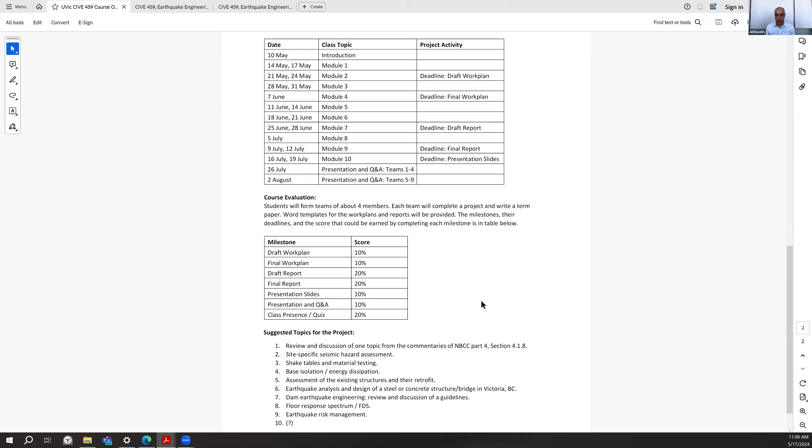So you guys have about 1 week to form your team and have a quick discussion and decide about the topic from the suggested ones or other topics, or even email me or email Behnam and ask what we suggest. Just create your team, write a draft work plan for us by about Friday next week, and upload it to Brightspace. That should not be too difficult.

As you see, even submitting the draft work plan has 10 scores out of 100. So don't skip it. If you jump into final work plan, you will lose 10%. I'm trying to really convince everyone to work with a schedule, and you will be very happy by about mid-July because you have done everything for this course.

That's about the outline and the schedule. And I think we didn't finish this one. Let me see if I can make it full screen. I'm using 2 screens today, so the microphone and speaker has changed, but I'm not seeing anybody objecting, so I think I'm audible. You guys are hearing me. For full screen mode here, and it's shared.

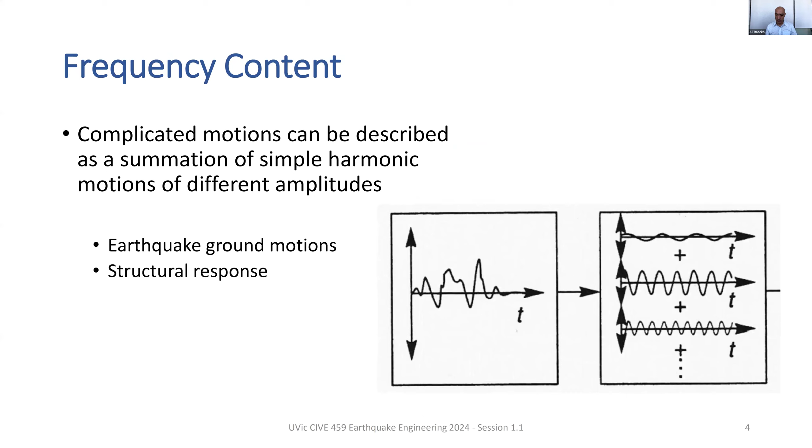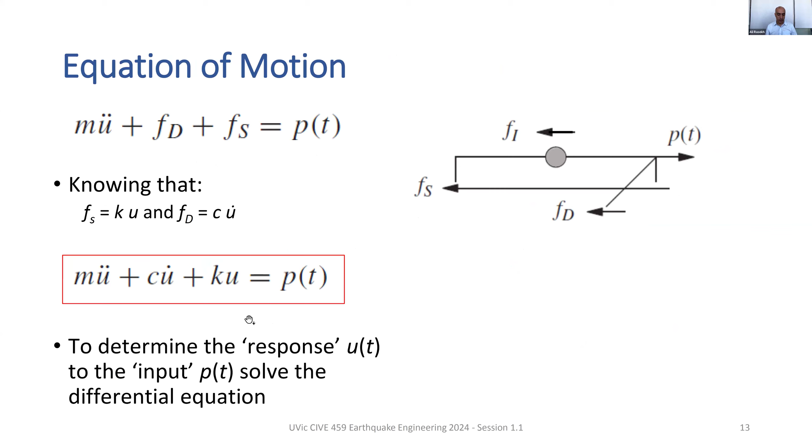Last time we tried to just talk about the basics of dynamics of structures, probably the most important slideshow right in front of you for most of the term. We covered the basics. We talked about the stiffness, mass, equivalent lateral load, and why the solution is sensible.

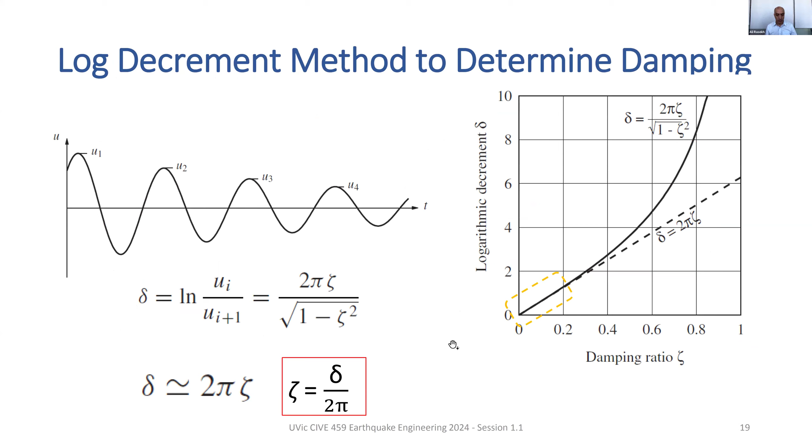What do we mean by free vibration? How can we use the outcome of a free vibration test, whether it's an experimental test or a numerical modeling test? For both of them, this works to obtain your period and also your damping, which are very important parameters. Real life experiments.

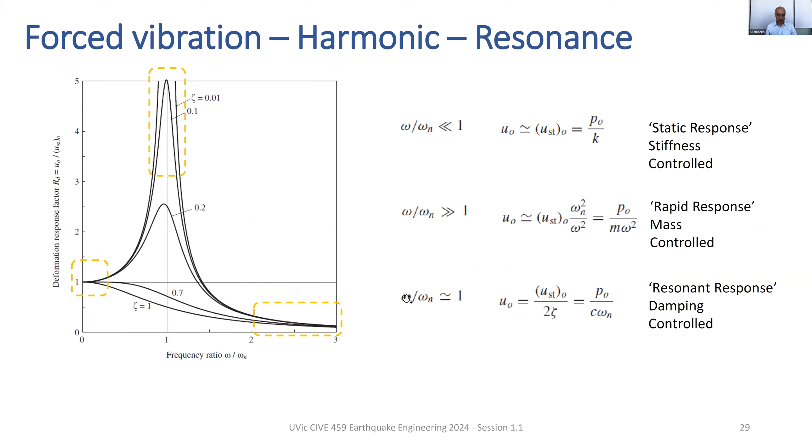And what if we have ground motion excitation, which is earthquake? Harmonic excitation, it's important and a useful tool, a little bit more advanced, but useful, using half power bandwidth to again estimate your period and damping.

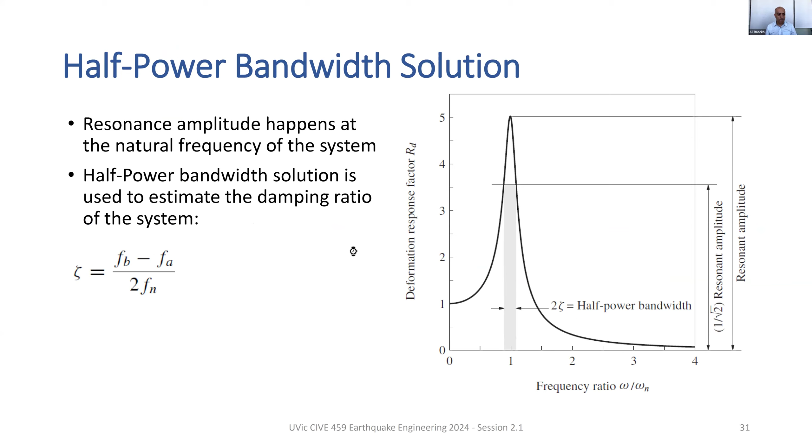Okay, I think we stopped right here, numerical time integration. A lot of times there is no closed form solution for real world problems, whether it's earthquake or shaking of a structure. On the other hand, myself and the newer generation are becoming too lazy to learn and understand the closed form solutions, and we prefer computer tools, which are mostly based on numerical time integration. We are becoming lazy, but we cannot be too lazy, because we cannot produce wrong results and blame it on the computer. We are in charge of correctness of the solution.

So there are some basic concepts in numerical modeling. The idea of time stepping. Time stepping means discretizing the excitation using time steps.

If you look at this plot here, we have the excitation, which could be force or base acceleration, and it's a function of time. We try to look at its variation in small time steps, so that's what we call time stepping. And at each time step, we apply the load to the system, to the whole structure.

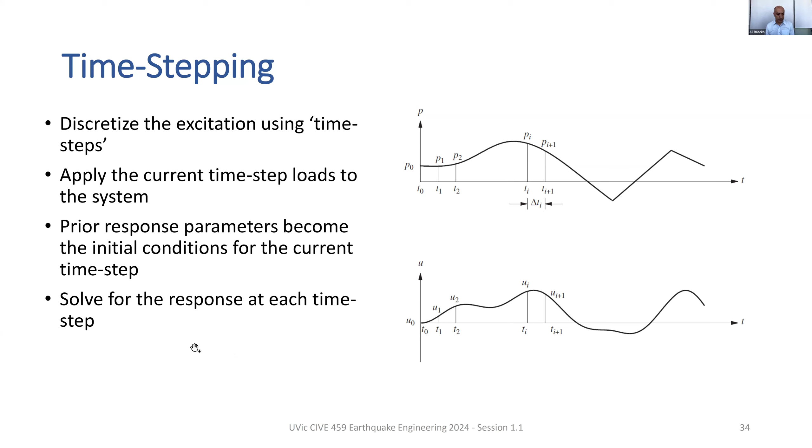Interpolation of excitation. Now, what we are talking about is that we have a curve of acceleration or a curve of forcing function, which is P. However, we are discretizing it, so we are really paying more attention practically to the values at Ti, which is Pi, and at Ti plus 1, which is Pi plus 1.

Therefore, we should have some assumption about how P, or acceleration, changes in between. And that assumption really affects the accuracy of the results and the outcome of the analysis. So that's something to think about even when you are using computer software to do this task for you.

So basically, the forcing function was changing like this, but maybe it was even more harsh, with a very rapid, huge change between Pi and Pi plus 1. But in most of the modeling assumptions, we assume that it linearly changed between Pi and Pi plus 1. We should be aware of that.

Interpolation of excitation is efficient for linear systems. Approximate the variation of the excitation between the time steps by a line, so we are using a line here. And use the closed form solutions developed for linearly varying excitation.

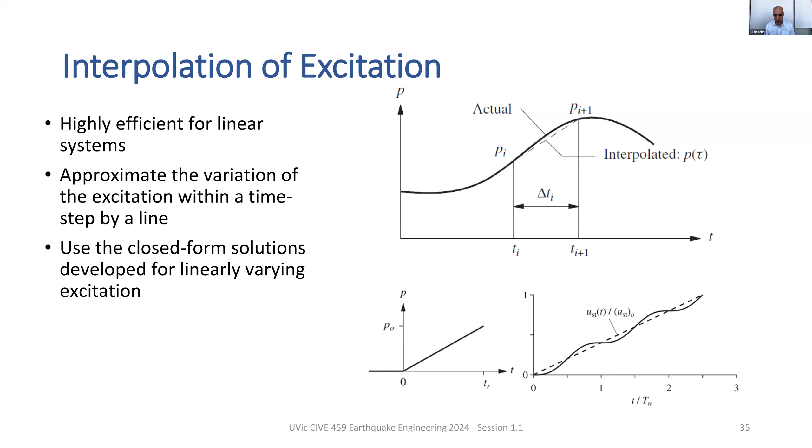And then use this, or apply this solution at every time step, which has high efficiency or accuracy for linear systems.

Then we have the central difference method. In the central difference method, basically, this is our assumption here. So when you have...

deflections through time, which you can record or calculate, we want to know how it's related with velocity. So U dot indicates velocity, and U with two dots indicates acceleration. And we use a simplified, not naive but simple, assumption based on engineering judgment: how can I measure velocity, the average velocity between two points?

Again, there are equations for that. Note that this is like between U3 and U1. So between U3 and U1, you try to use U3 and U1 to basically calculate the velocity at U2. And therefore you have two time steps here.

And similarly, you can work out the acceleration. We had the equation of motion. If somebody follows this slide in one session, they should be fresh on this. And they can just insert this approximation of velocity and acceleration into the equation of motion.

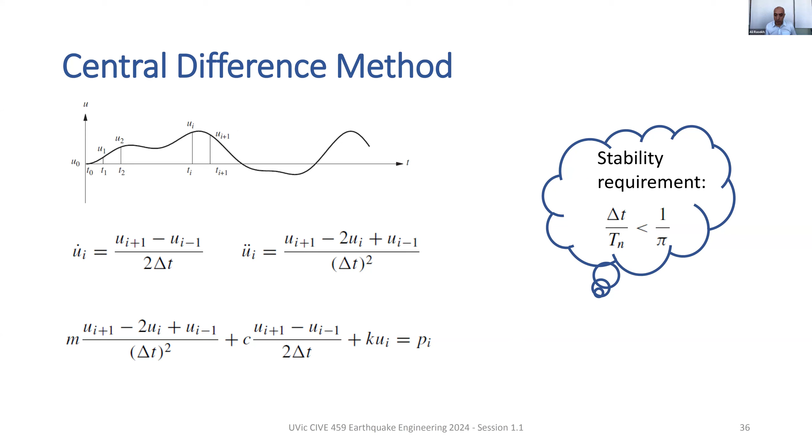Then there's this other method for discretization, called Newmark's method. Again, you have approximation of velocity based on acceleration, and displacement based on velocity and acceleration. You want to have only one unknown instead of three unknowns - velocity, acceleration, displacement - since your equation had all three of them. You reduce it to only one unknown using these two equations.

Again, you have a stability requirement. That's something to be aware of, that different methods have different stability requirements. When I edited the slideshow last year, I tried to keep it simple and high level. As engineers, we don't want to go into a lot of detail on these math equations, unless it's for research. You guys can pick your research even in this area, but we need high level awareness, especially as we are all using computer software, and sometimes we're surprised or shocked by results that don't make sense, or are unstable or diverged.

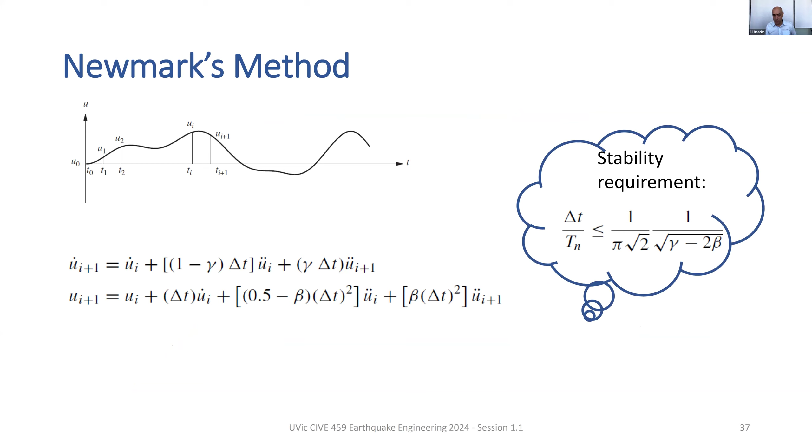Similarly, for linear acceleration assumption, different values of gamma and beta apply, and it's not going to be unconditionally stable. You're looking at the same equation: 1/2 minus 1/3, so it has some value you can calculate. So we saw a case where we had unconditional stability.

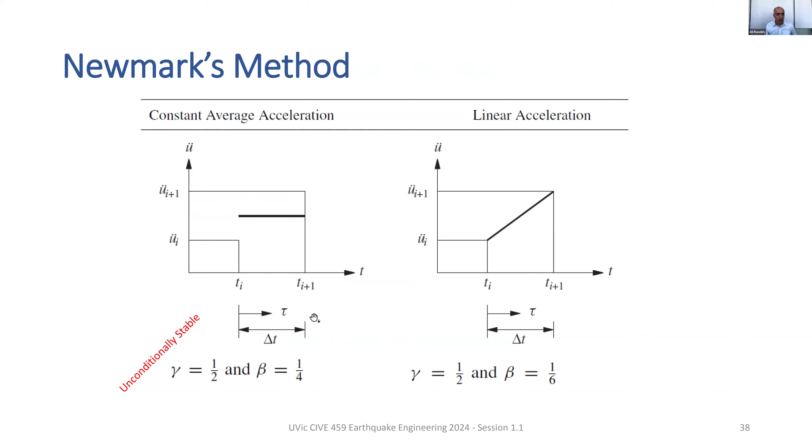Now how to use this knowledge for SAP 2000, our preferred software for this course. I copied this from the CSI knowledge base, and the recommendation was that for well-behaved problems, we recommend using the Newmark method with beta equal to 1/4, which uses the constant average acceleration method. So the suggestion is to use the unconditionally stable solution, according to the owner or creator of the software vendor.

For poorly converging nonlinear time history cases - whether it's a structure with a lot of nonlinearity - if you have difficulty obtaining a converged solution with solution number 1, then you go for solution number 2, which is the Hilber-Hughes-Taylor method, using alpha between 0 and minus 1/3. That's just copied from their website. We didn't really go through this solution, but that's the recommendation from the website.

Note that all nodes should have mass, and rotational inertia may be added to improve dynamic response. This should be noted that in dynamic analysis, generally we are dealing with mass and stiffness, so don't forget to add mass to all nodes. Even if you have a negligible mass, just use a very small number rather than zero, because the software requires that all nodes have mass. That's for your dynamic analysis numerical solution using SAP 2000.

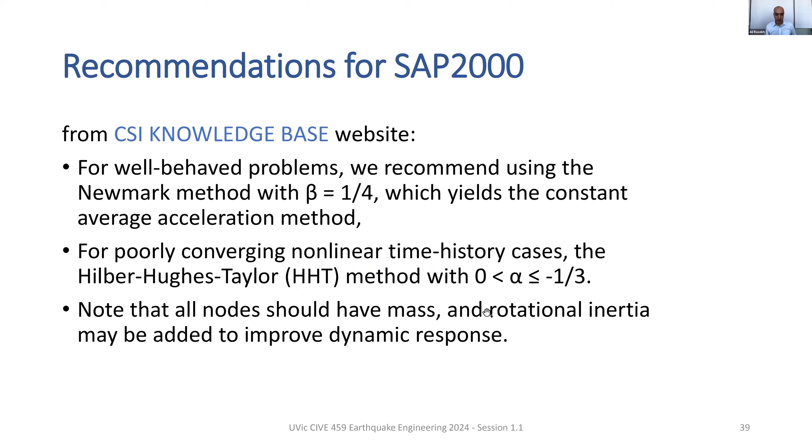Now, introducing a very important solution in structural engineering. It used to be super important, and I consider it still very important, although nowadays with very fast computer systems, everybody, including myself, wants to jump into numerical integration. But still, for understanding the structural response well and for back-checking the response, we use response spectrum. You also need a good understanding of response spectrum to understand the simplified solutions from codes like the National Building Code of Canada and others, which in their mindset are based on response spectrum solutions.

So let's first see what is a response spectrum curve. Assume that you have an earthquake happening and you want to create a response spectrum for that earthquake. As I said, structural engineers normally know earthquakes as acceleration records. Now assume you have your earthquake and you have a tool, say SAP 2000, and you want to know the response, just naively build up your response spectrum curve.

What would you do? You create a few structures. Here we have shown three structures with different periods. As I said previously, we can manipulate the period of a system, and we want a simple system because we want to run it many times. We can manipulate the period by changing the stiffness, mass, or both. So here we have created three systems with three different periods. We use our numerical integration computer tool, SAP 2000, and build up the response of interest, maybe acceleration or displacement or something.

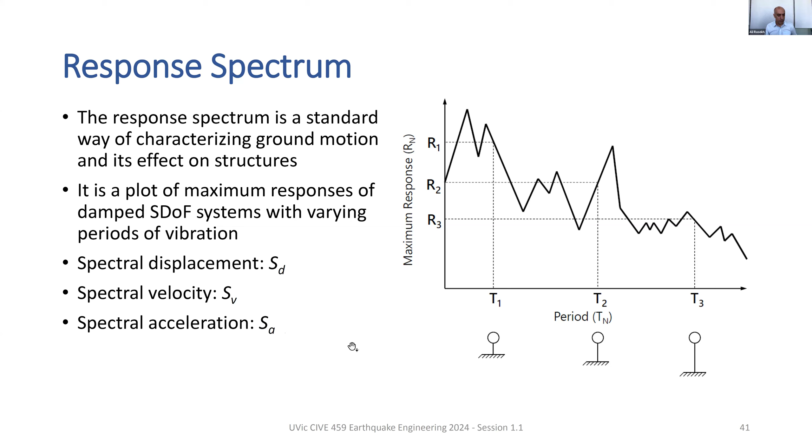Damping of interest for response spectrum is normally 5%. So all these structures have varying periods, but they all have 5% damping, and this curve would be related to 5% damping. Normally, we create a spectral displacement, a spectral velocity, and a spectral acceleration. The third one is the most important, which is of interest in structural engineering. The first one is also important. The second one, not as much.

So these are the typical spectral acceleration plots that you can create with the methodology I explained. I think they are identical, however we have used a logarithmic scale for this one on the right. Sometimes it's better because it widens the periods of interest for a lot of structures, where the curve also varies a lot. So there's a lot of variation between 0.01 and 1, and this presentation on the right has widened those areas, while this presentation is narrower, so you cannot really see the changes between 0 and 0.5.

Now, as I said, we create different curves for different damping values. As we expect, when we increase damping, the response decreases. Damping is like dissipation of energy - we allow more dissipation of energy, and the structure moves less or has a smaller acceleration on top of it with the same earthquake. So that's as expected, but we create different curves for different damping values.

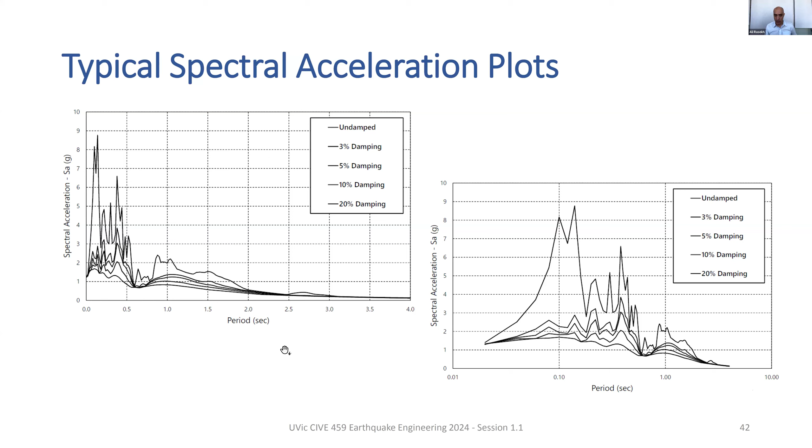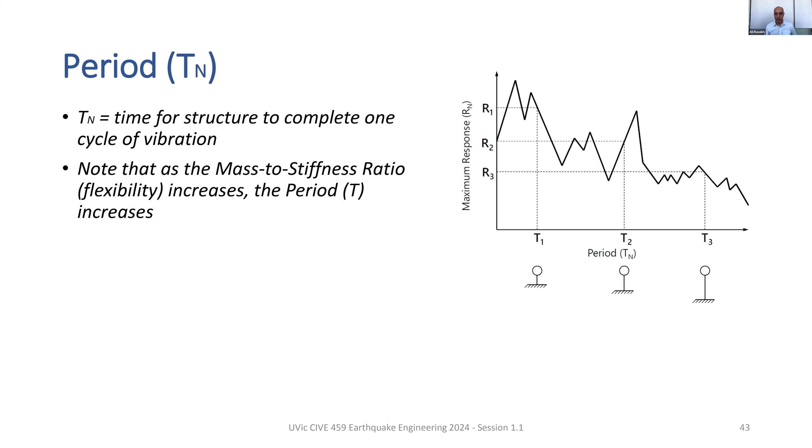Developing the spectral response, you just change that period and you read the response at different periods and plot it. Then you have the maximum response, or spectral response.

Discussion on damping ratio, which is related to each curve. Damping ratio is expressed as a percentage of critical damping. When you receive a single plot of spectral response, you should have the default of 5% in your mind. Within the industry and NBCC, the default is 5% for creating a plot, but most of the time we write on top of it or by each curve whether it's 5% or 2%, etc.

Effects of damping increase as connections loosen and structural members deform. These are the phenomena that increase the dissipation of energy, and therefore cause more damping. Going through this typical table - I'm not saying use it exactly for your future consulting project, but typically that's what happens.

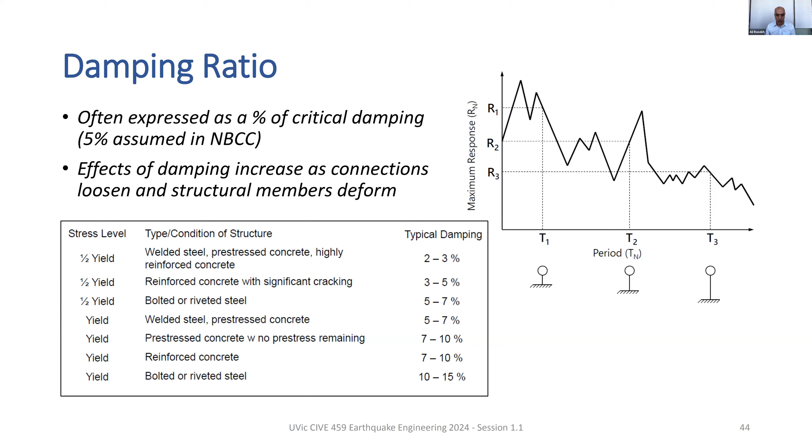Again, the idea of maximum response, more described in a picture. You want to build up this curve - we are still in the process of building this curve. You have your earthquake that is happening, and there's ground acceleration with time.

That's what is given to you, say, by geologists, and you know that in your region that is the ground acceleration you expect. You feed it into your SAP 2000 model, and you read, at the roof of your single degree of freedom model, a structural response.

So this is your structure. You use SAP 2000, you make a model, you read the maximum value of a structural response, and this value for T1 comes here, and you plot it here. You put a point here, and then you create your structural response, or maximum response, or response spectrum.

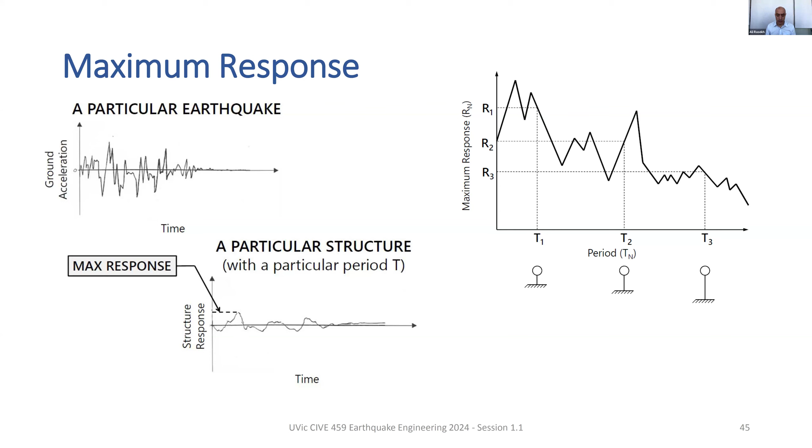Deformation response spectrum procedure - again walking through the procedure one more time with a little bit more detail for a more worked out example.

You want to create the response spectrum for El Centro ground motion. This is the El Centro ground motion, which is acceleration calibrated with g, gravity. The acceleration is changing, and the PGA, what we call peak ground acceleration, is less than 0.4.

You want to create the deformation response spectrum for those three structures we were talking about - you create three of them, single degree of freedom structures, all with 2% damping. So we are creating our spectrum for 2%. By changing the height, which is stiffness, or by changing the mass, we create three structures with periods of 0.5, 1, and 2.

And we said that the spectrum is developed for 2% damping.

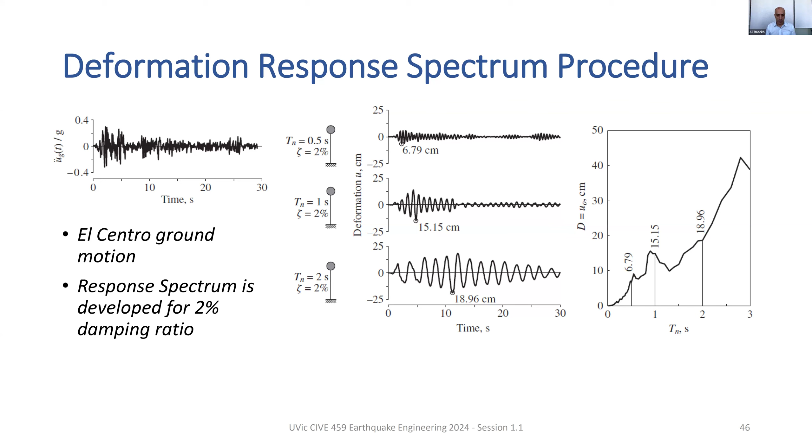But there's good news—SAP 2000 internally does that for you. If you find it through the menu, you can just say what your acceleration is, and the program will run it. Because it's single degree of freedom, it's much faster than you think—the program just runs it 100 times, and in a millisecond it produces this curve for you. But you can do it one time, try yourself, or do spot checks. The program creates this for you, and then you do a couple of spot checks to make sure you know what the program is doing.

Now moving on—traditionally the computer resources were even more limited. To run even a 1 degree of freedom system was a little bit time consuming, and calculations were time consuming. So we made it even simpler: instead of creating the acceleration spectra or velocity spectra, we just create the displacement spectra as described. There are two equations to change displacement spectra to velocity spectra and to acceleration spectra, but because it's not exact, there's some inaccuracy.

We call them pseudo acceleration and pseudo velocity, because it's not exactly the maximum acceleration, but it's very close to it—so it's pseudo acceleration spectra and pseudo velocity spectra. Through this process, the computer program—SAP 2000—creates the displacement spectra, and velocity and acceleration are calculated based on that. Again, emphasizing: not identical to the corresponding maximum response, however they might be close.

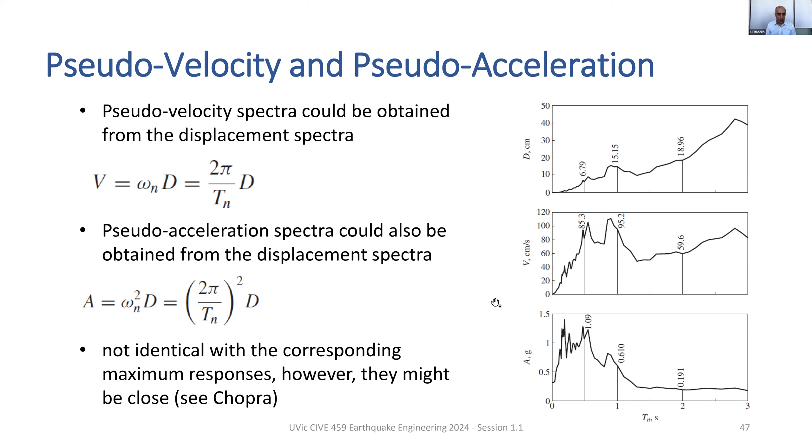If you look at Chopra, it discusses why we say might be close—sometimes they're not too close, but that's an accepted solution in the industry. This plot is really old school, but that's what they used to do in all the books. They wanted to combine these three plots into one, so they had this innovative way of using a logarithmic scale in perpendicular directions, showing all three spectra in one plot. It was popular—if you find all the reports, that's what they had, showing the spectra in one curve.

So this was for El Centro ground motion. Damping ratios between 0 and 20% are shown here. The highest response is obviously at 0% damping, then 2, 5, 10, 20, because higher damping results in lower response. If I can still do it correctly—since this is something you basically only see in books nowadays—you want to know what your response is at...

...0.03 with 0% damping. So you go up, and pseudo velocity is this—it looks like something between 2 and 3 centimeters per second. Then the same, if you go perpendicular to pseudo acceleration, you can read the pseudo acceleration for the same criteria—it's something between, I think, 1 and 5. So you should carefully be able to read it here.

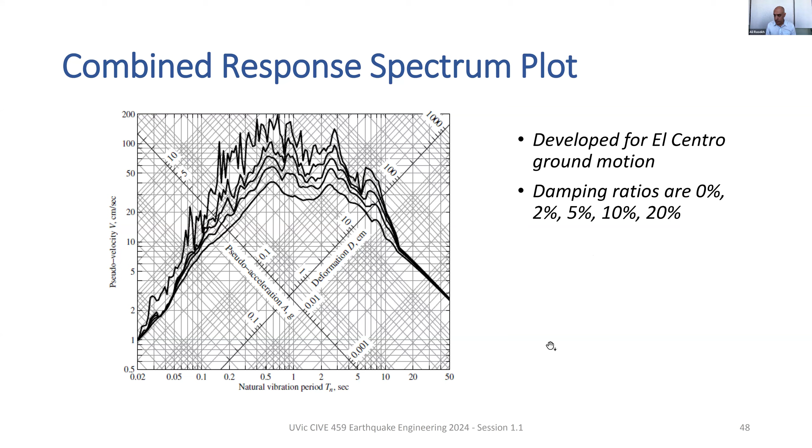Sometimes working in the industry you realize your geotech colleagues talk a lot about frequency content, and structural engineers talk more about response spectrum. Basically, frequency content is the Fourier amplitude of the motion - they perform a Fourier transformation and obtain the amplitude of the harmonics. Sometimes it's required that they do a spectral matching, modifying certain response for the frequency content at certain frequencies, then do a reverse Fourier transform to give us a motion which is slightly different. That's obtaining frequency content. Response spectrum is what I described in the previous slides. Both have indication of which frequencies are more important, but otherwise there are different procedures used for different reasons.

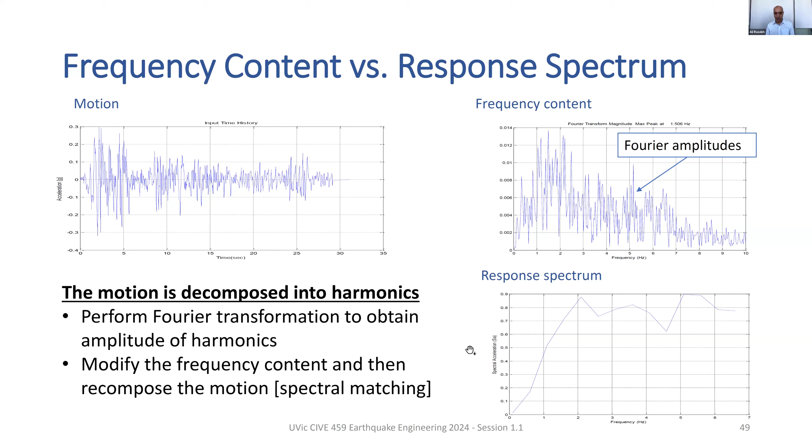End of this session or sub-session. So, questions and discussions. Oh, I'm seeing that, sorry, I was not paying attention. David and... oh, it's from Von Abrego. I think it didn't show up.

That's a good time to get back to discussion about the projects. How many people are allowed in our group? I suggest 3 or 4 people, highly recommend that. I already told other teams that if you know each other and want to work together, go ahead, create a 5-member team. But you need to create a work plan first, and it should be convincing in a way that there is enough work for 5 people - you should prove you keep 5 people busy. So generally, highly recommend 3 or 4. If you are 5, okay, we can live with it, but prove you have enough tasks for 5 people.

Is the work plan draft due on May 21st or 24th? 24th, yeah. I'm always in favor of the easygoing interpretation - so I said 21, 24, the easygoing interpretation is 24. So yeah, by the end of next week. Please do it by end of next week, and you will feel good that you know what you want to do and have planned your workload for this course.

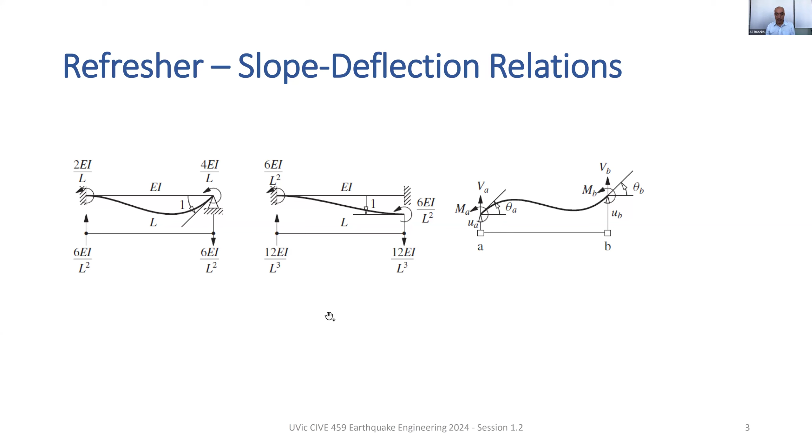If I can emphasize anything here, have this table in front of you to double check, or sometimes for basic calculations. The second question is: what if I have a beam element fully constrained on both sides, but one side moves by a unit of 1 in your system of units, whether it's meters, inches, or centimeters? What are the reactions in terms of shear force and moment? Traditionally, structural engineers were able to, and should still be able to, for checking and reviewing computer models, combine and see every movement of their structure as a combination of these two movements, and therefore calculate the end moments and shear forces. That's a very basic and important concept in structural analysis, called the slope deflection relation.

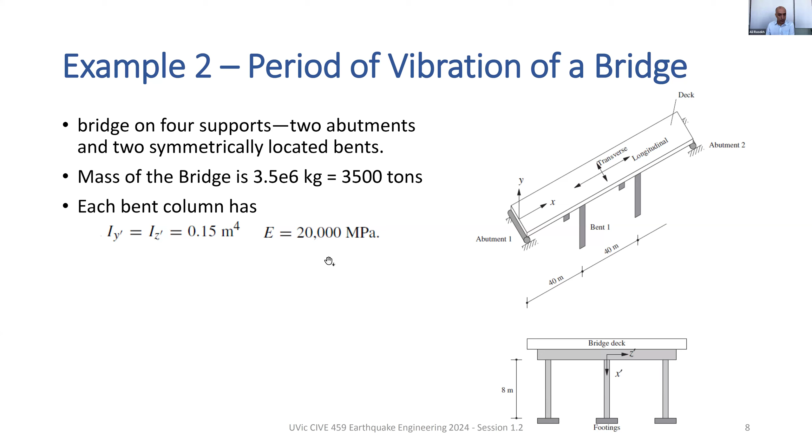The I factors are the same in both directions. As you see from this picture, X is vertical, so the vertical direction is X, and in the 2 horizontal directions it's the same—let's say it's circular or square. It has basically the same stiffness in both horizontal directions. The elastic modulus is also given to us.

Now moving on, we try to obtain the stiffness of the bent. The three are identical, and we are not too concerned with directions. The 2 directions are the same.

Again, you should be able to quickly find this in your structural analysis books, on the web, or I don't know, ChatGPT gives that to you. What is the typical stiffness of a column? You can find this. This is used a lot, so you should be able to recognize it. At least for myself, I'm still a person who uses the web a lot, but because I know this, I recognize it. So if a website or ChatGPT tells me it's 3 I over H, I say no, that doesn't look familiar. So you need the expertise, but then you use the tools, and you know the difference between correct and incorrect.

The importance of expertise remains the same. Again, so you have 3 columns, each one has this stiffness, and you add them up together, go through the number calculations, and you get the stiffness of the whole bent, consisting of 3 columns. Now for, I think we should call it longitudinal, so it's like along the bridge. You have 2 bents, and each bent had 3 columns. So you are seeing the effect of 6 columns in longitudinal direction, and you calculate the total stiffness of your system.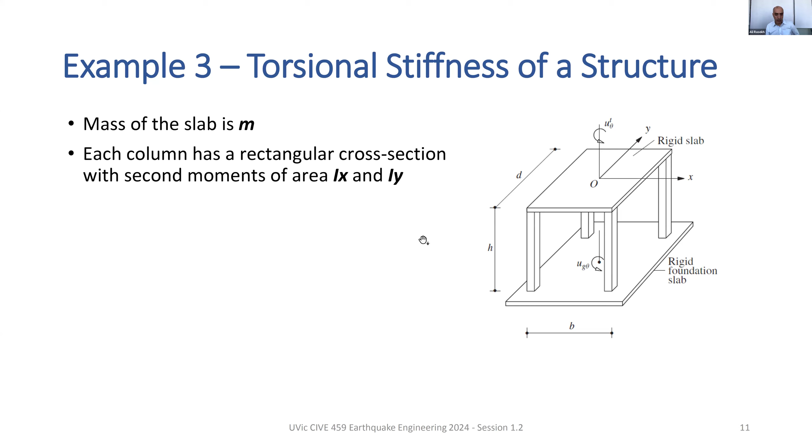So you can get your rotational mass and you have your rotational stiffness. Again, you can hand calculate your rotational period to start with. But we stop here, we jump into a different example.

Here's a shake table solution. I think I copied it from Chopra last year, but it has a lot of similarities to what we want to show you on June.

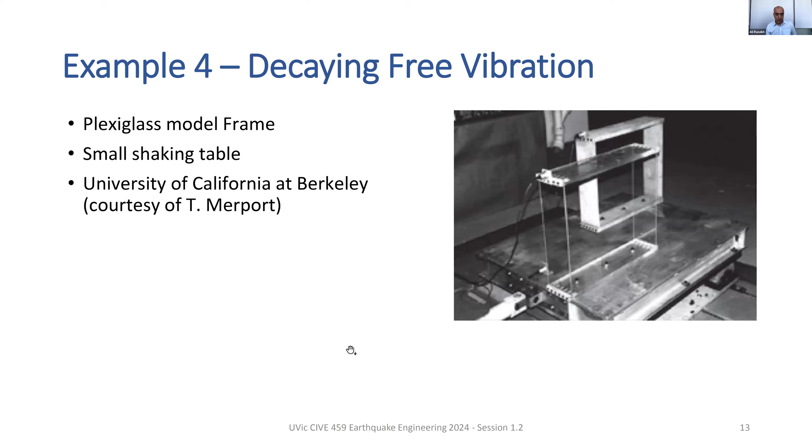We can do some tests, we will try to do the same thing in class: shake it a little bit and then leave it without any forcing function. The deflections will decay through time. So that's a decaying free vibration after the first shock.

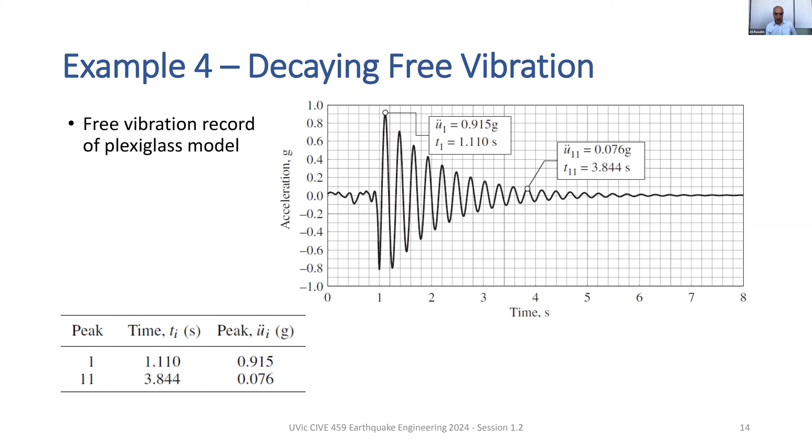We record the level of deflections at different time steps and the number of peaks in between. Between time equal 1.11 and 3.844, that's peak number 1, that's peak number 11. I would say there are 10 back and forths in between, and we have the value of the peak, in terms of acceleration.

Because there were 10 back and forths, the period could quickly be estimated in free vibration. Basically, the change in time divided by 10 back and forths, your period was 0.273. I've shown you this solution for decaying free vibration and how much the response changed in 10 steps, dividing by 2 pi and then dividing by 10 because there were 10 vibrations, giving a very quick and good estimate of the damping of the system in this example.

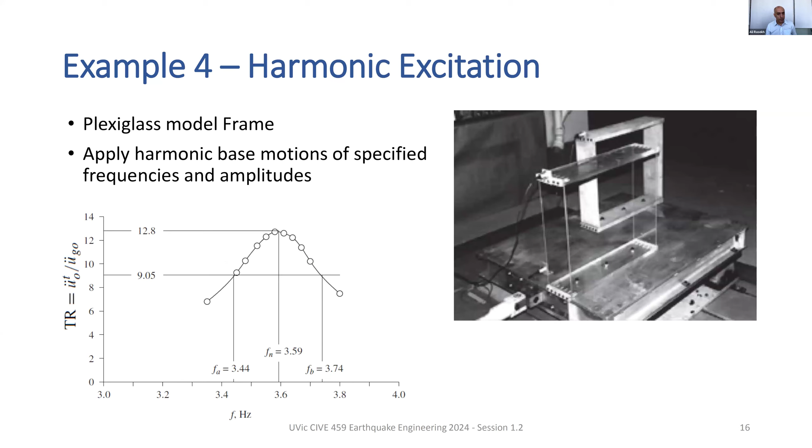This is the free vibration, a quick estimate of period and damping of the system. Next time we will proceed to harmonic excitation for the same example.